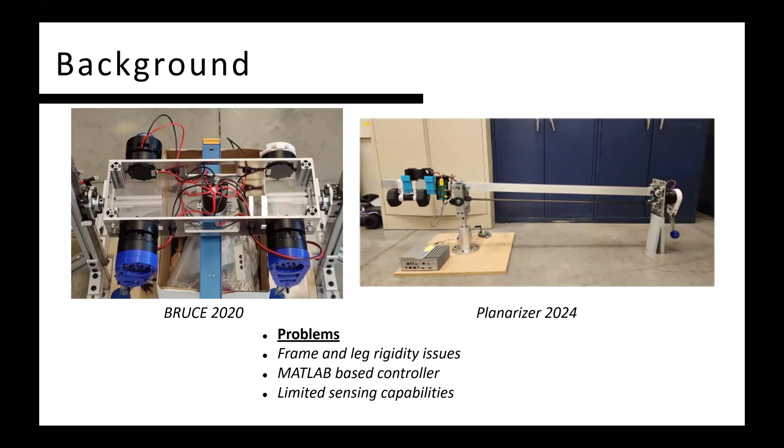So our objectives are going to be to improve mechanical design, so handle those issues, and then as we integrate new hardware components, we're going to have to improve the hardware to be able to take on those. We're going to design a wireless mobile robotics development stack. So our development and our control, and we're going to be able to view the robot wirelessly. And that's going to give us some increased mobility because we were previously tied to the ground.

And then we're going to maintain modularity in our hardware and software, and that's going to ensure that as we move forward with this project into the future, we can keep that long-term utility. So some of the things that we can make now are going to be useful into the future.

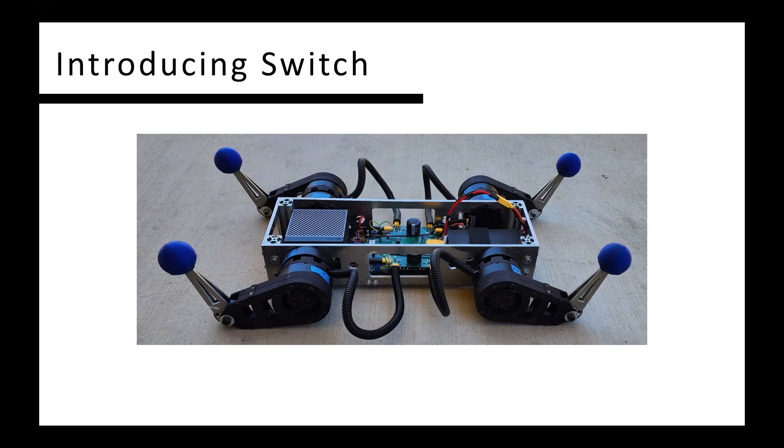So overview. This is Switch, so this is our upgraded version. We've got some new hardware here. It took a lot of work, but we got there. To highlight a few things, we're using the Steadywin GIM8108 mini cheetah motors. We're going to talk more about these later. We've added an IMU, which is underneath the PCB. And then our compute module is the Jetson AGX Orin Dev, which is very exciting. We get to use that.

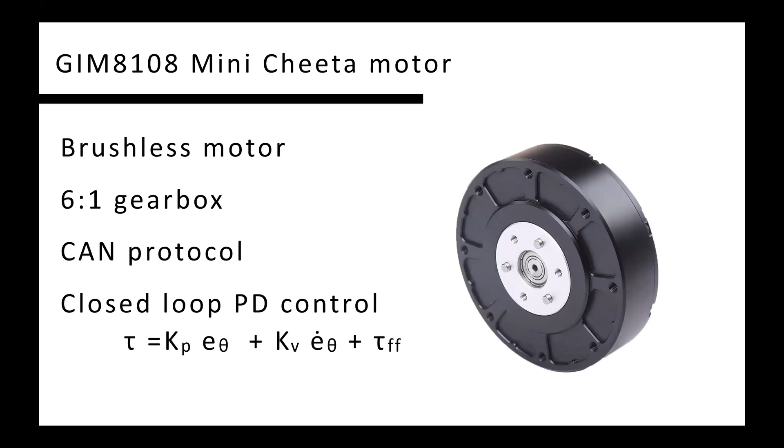Additionally, we've got a LiPo battery in there. So we've got mobile power, and then also a power distribution board, or PDB, which takes that power and distributes it to the motors. Starting out with the motors, these guys are more than just your standard brushless motor. So they've got a brushless motor in there. They've got a 6-to-1 gearbox, and then they also have a microcontroller.

And so we can connect to these motors via CAN protocol and send them a PD control message for positioning. So we can say, go to this position and maintain that position with a set amount of gain. This is pretty exciting, gives you a lot of different approaches for control. And then you can see the equation on the bottom there is describing how they're running that closed loop control.

For our IMU, we're using a BNO08X. So this is a 9-axis IMU. It's actually got several different sensors on it. So an IMU is using an accelerometer, a gyroscope, and a magnetometer, and that's going to give us orientation, velocity, and acceleration. Our communication protocol is either I2C or SPI to connect to this thing. And this thing is operating at a maximum of 400 hertz, plenty enough for us.

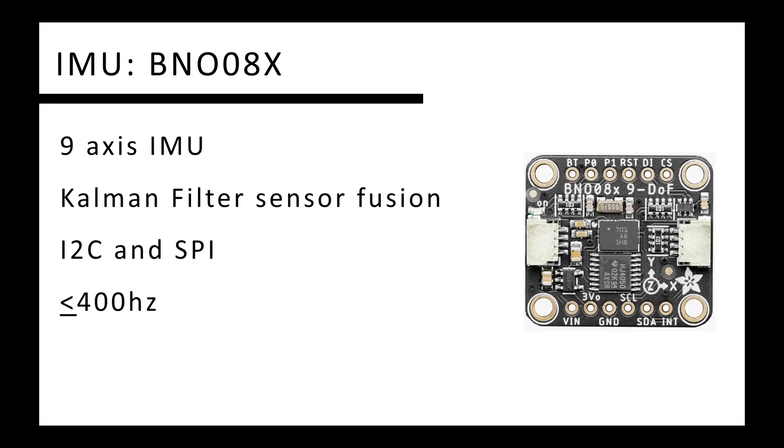And then just to touch on it a bit, this isn't the focus of the presentation, but we've got the NVIDIA Jetson Orin. The thing that sets these apart is really 3 reasons. They're quite low power, they're quite low mass, and the performance in AI is really something special while being both light and power efficient. So this is like run AI on multiple video streams levels of power. We're not going to be using it today, but it really sets us up in the future to be able to explore new topics.

So for our wired connections, we've got the motors connected over two CAN buses through CAN transceivers to the Jetson. And then on our I2C bus, we've got the IMU connected.

Both of the CAN buses are connected to the power distribution board. The power distribution board has two microcontrollers on board, so they can monitor the battery voltage and current and be able to send messages over the CAN line to the Jetson, so we can monitor the battery capacity and how much current's going through things.

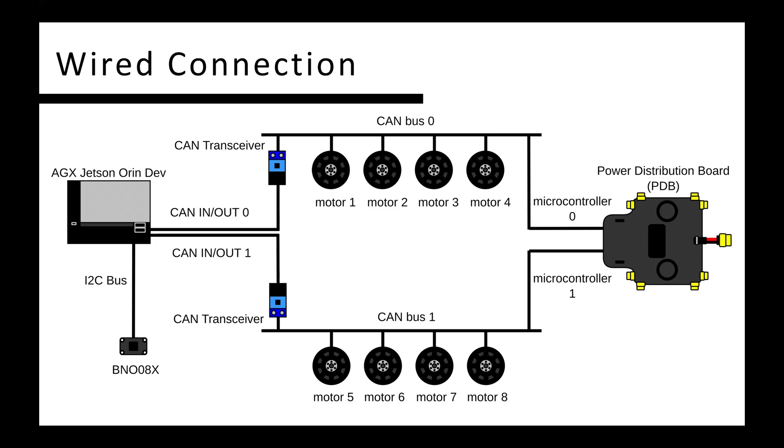Okay, so some mechanical improvements. We started out with this thing, the motors: when you tried to program them, you need to connect to a UART port, but on the hip motors on the sides, the cutouts are a little bit too small, so you couldn't actually plug anything in while it was connected up. So you have to take the whole thing apart to program it and then put it back together. So we went ahead and widened those up, and we can program them whenever we want to. Makes things a bit more convenient.

The frame had that stiffness issue. When we got it, it was actually held together by a strip of duct tape. When we're putting all this hardware on, we really need everything to be quite stiff, especially with the IMU. So we machined some frame stiffeners, installed that, and everything gets clamped together. So we got a big improvement in stiffness.

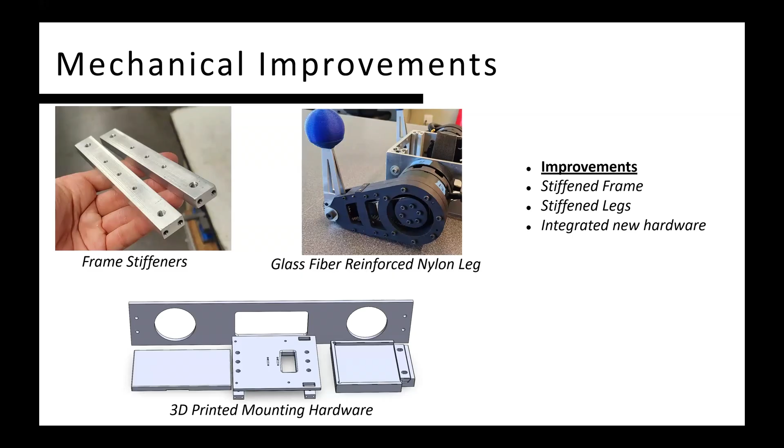For our legs, we reprinted them in glass fiber reinforced nylon, and that stiffened everything up, made everything a little bit more robust. And then we 3D printed some new mounting hardware. So we've got the battery mounting hardware for all of our electronics and PDB mounting, and then our Jetson mount. And so this stiffens the frame, stiffens the legs, and now we can integrate all of our new hardware. So now we can get into software development.

So taking a step back, when we think about the main challenges for developing advanced robot applications, the three things that we're going to focus on are, first of all, writing the robotic software. Second, resource allocation. So now that we've written this software to run things like the IMU and the motors, we're going to be running all that in parallel, so we need some way to handle all of these parallel processes. And then we're generating a huge amount of data. We need to be able to communicate that data either on board the robot to get to the controllers where it needs to go, or to different programs, or in some cases, connect it to the internet and be able to access this thing anywhere in the world.

So our solution for that is ROS2. ROS2 is an open source project, and because of that, it's got some pre-built packages. So in some cases, we can just pull software right off the internet to handle some of the hardware that we're using. Then once we've got that software, ROS has several different ways to manage these processes, so everything is being run at a regular frequency. And then it's got ROS2 middleware, which is going to handle all of our communication. They usually use DDS, but we're actually using slightly different middleware called Zenoh.

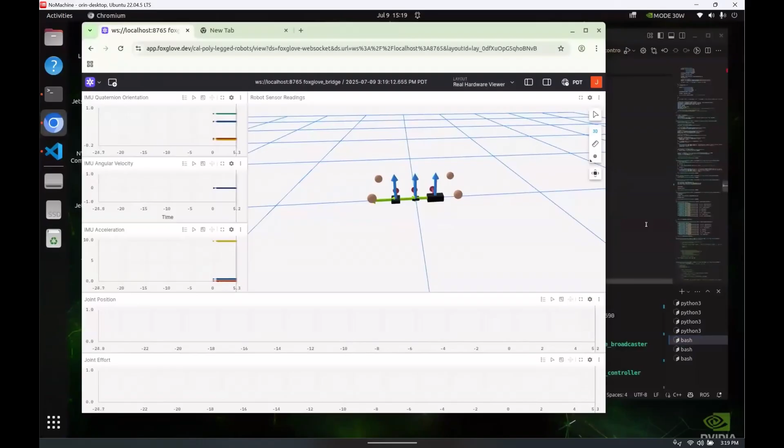And now this is our Foxglove workspace here. And we can start up our zeroing procedure. And if we look, all the legs are moving. And now our robot is synced with our Foxglove interface. So over here, we have joint positions, joint efforts, and then here we have data from the IMU. So we have orientation, angular velocity, and acceleration.

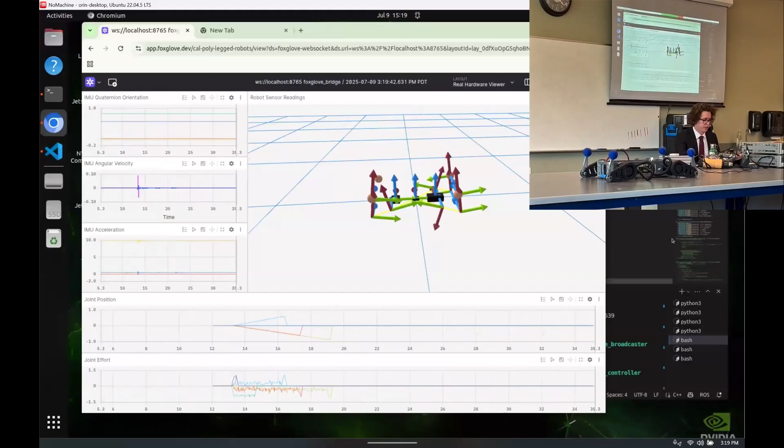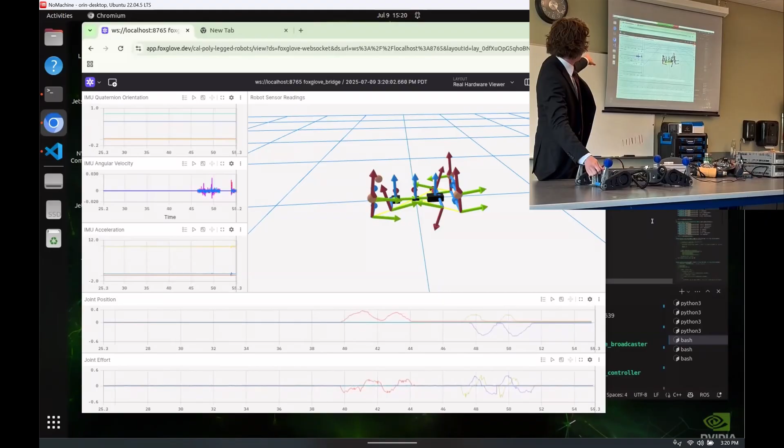So if this is working correctly, I can move a leg here, and it matches up in our workspace. I will move around. If I pick up this robot, because we have the IMU, if you look at the top left side, we're going to see spikes in orientation and acceleration.

And then we can get a readout over here. So we're seeing all the motors are zeroing and everything is working correctly. Do Control C, everything shuts down. And we just got a clean startup, ran our standard operating procedure, and then shut everything down.

All right. Now on our implementation. So how exactly are we doing that? So we've got the Jetson on board the switch, and that Jetson is connected to a router in the back of the room. Through that wireless connection, we can manage our NoMachine service and our ROS2 middleware service. In this case, me remoting into the Jetson, that was NoMachine, and we could see ROS2 running there.

But we actually have additional utility here. Because we're using ROS2, we can actually have other users connect to this Jetson and be able to access the ROS2 workspace, get all that information that Foxglove is getting without needing full admin access with NoMachine.

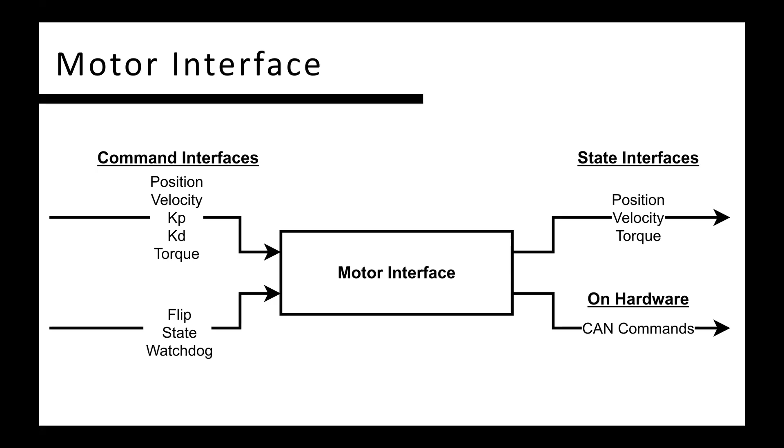Taking a kind of a different look, for our IMU, we got to do something kind of interesting. There was a really, really well-written ROS2 node for a BNO08X, which is exactly the hardware that we're using. Several thousand lines long that handled all of the difficulties, but it wasn't in ROS2 control. So what we ended up doing is we copied that node, and then we wrote an IMU forwarder. So all it has to do is subscribe to the topics that this node creates, and then forward it as state interfaces into ROS2 control land. And then we've got all of the information wherever we need it.

So when we're trying to debug this thing, it's important to realize that failures are going to cascade upwards here. So if we have a low level like power failure, that's going to cause everything upstream dependent on that to fail. This kind of just helps us with debugging. And also, as we're designing the system, if some systems fail, it's going to cause everything upstream of it to fail. So to the best of our ability, we try to make this as thin as possible, but you're going to get dependencies. It's just kind of an inevitability, but we've done our best to limit those.

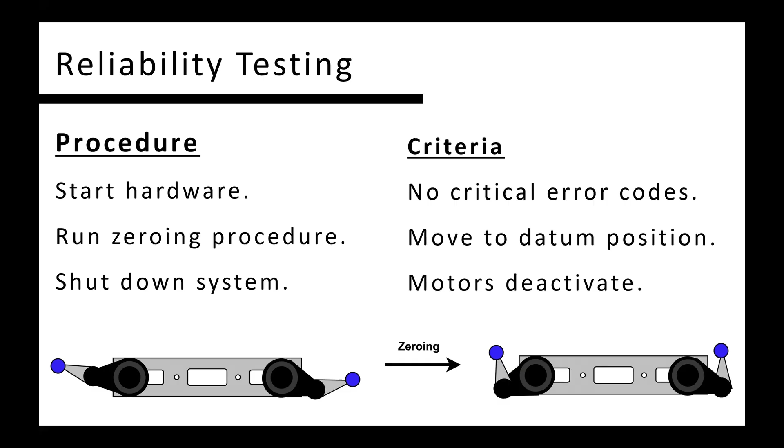All right, and now on to our low-level testing. We're going to look at reliability testing, our IMU benchmark, our IMU jitter test, and then an impulse test. So for our reliability testing, that procedure that I just showed you at the very beginning, we're going to start up our hardware, we're going to run our zeroing procedure, and we're going to shut down the system. What we're looking for is no critical error codes. We want everything to move into position. We're going to be dependent on that when we run the robot. And then when we shut everything down, we're looking for all the motors to deactivate cleanly. We don't want any error codes or anything like that.

So our results, we ran 20 trials and we got 20 successes, which is pretty good. Something interesting though was as this thing starts up, motor 17 had a watchdog hit. And in this case, that's okay. As we're starting things up, things are going to take a little bit longer to run because you're starting all of that activation code. It isn't just like standard operating. But it does kind of beg an interesting question.

Originally, the way that ROS2 control was organized, if you have any of these hardware interfaces take longer than you expect, everything in your system will kind of hang up longer. So what we ended up doing was a multi-threaded approach. And so that lessens our dependency on that. So one of our motors can completely crash and everything else can operate without getting hung up.

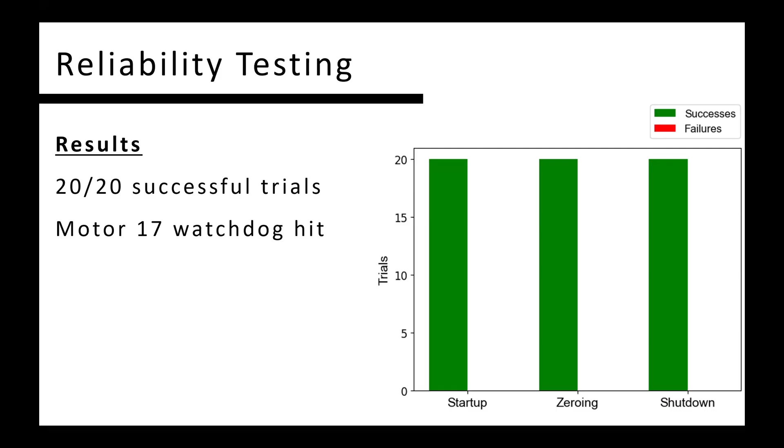So for our IMU benchmark, this is just to take a look at what our IMU does in that standard operating procedure. So we're going to record some data with Foxglove, visualize it, and then we're going to rotate, and we're going to take a look at all of the readings from our sensors.

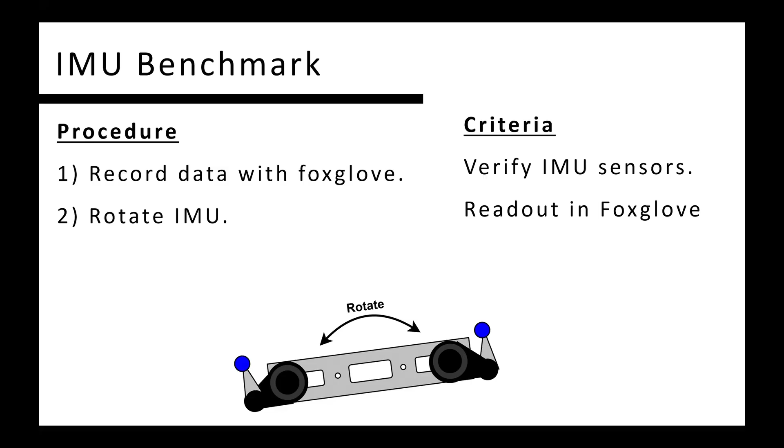So just like we saw in Foxglove, we're getting some nice output data over here. And then if we look at our orientation, it's a little bit difficult. We're expressing that in a normalized quaternion, so it's a little difficult to understand. But if you look at the linear acceleration, 9.8 meters per second squared, pretty close to 10.

So as we're rotating this robot around, we see X is positive, and then we rotate 90 degrees, and we get Y being positive, and we rotate again, we get a negative X, and we rotate, and we get a positive Z. So we're seeing what we're expecting here. And then additionally, we can focus on the magnetic field here. So the magnetic field is helping us with orientation data. And then we had an interesting question about that.

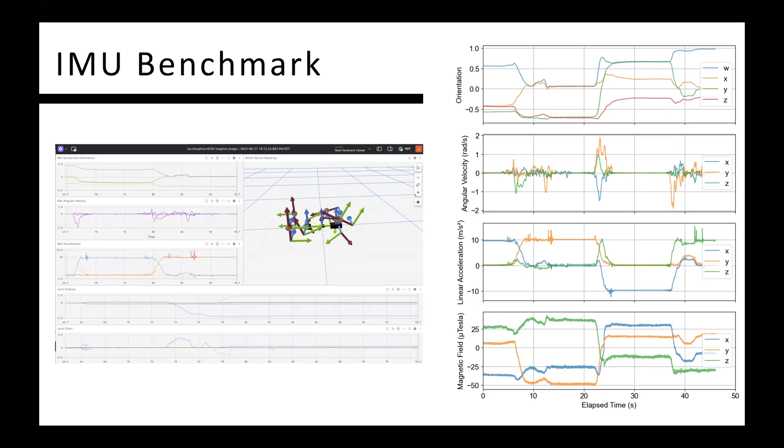Since the magnetometer is going to be recording electromagnetic fields, we've got a lot of motors here that are inducing electromagnetic fields. And not only that, they're FOC motors. So they actually have a magnet on the shaft, which is acting as an encoder. So this is another rotating field just as the motor rotates. So the question is, is operating the motors on this thing going to make the IMU go haywire?

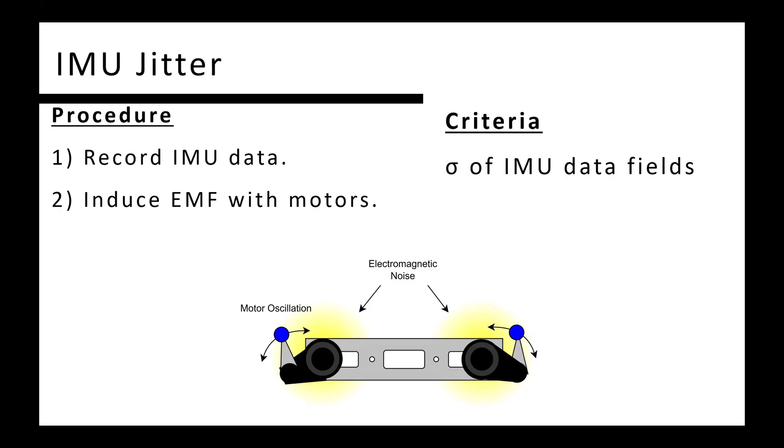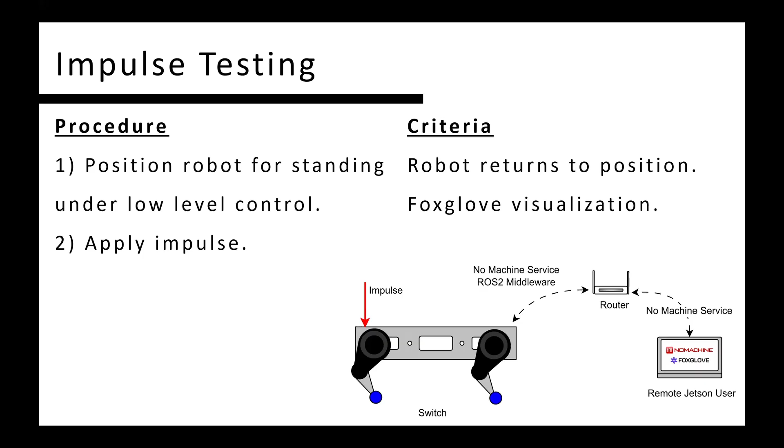All right, and then impulse testing. So we got this robot standing up, and we can do that because we can just send a position command to all these motors to say, hold this position. And then as it's standing, we can apply an impulse, we can hit it, and we can read everything in Foxglove and just make sure that everything is operating as we'd expect, and also that this thing recovers from the impulse.

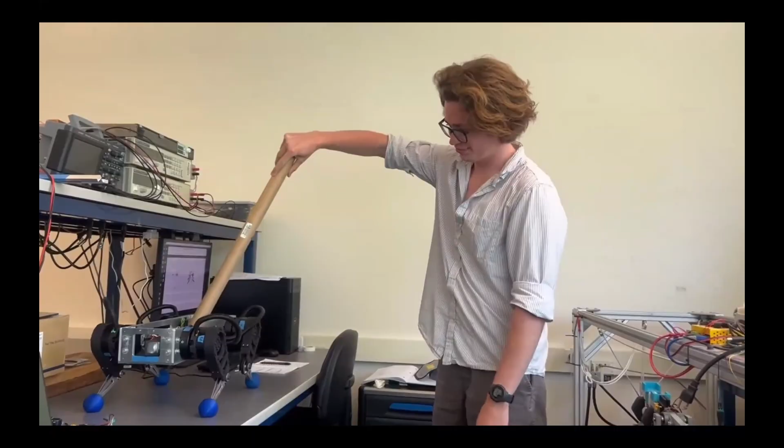This was a fun one. That last bit was me telling Jack that I had to kick it next, like Boston Dynamics.

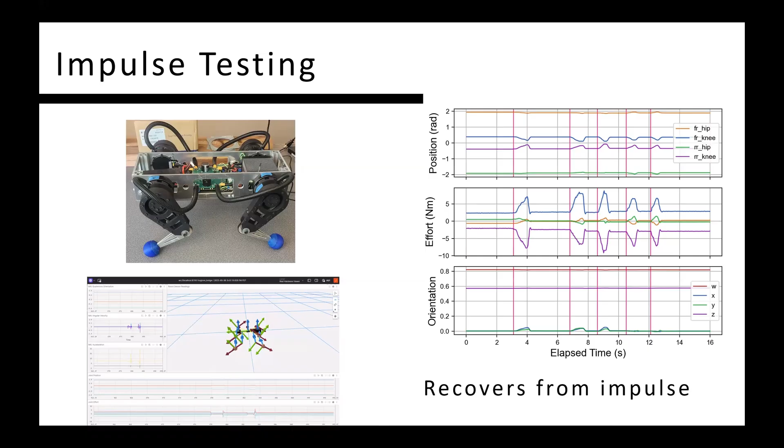So conclusions, we were able to improve our design here, and we're able to integrate all of that new hardware we're very happy about. We were able to specify a mobile robotic development stack, and we achieved that increased mobility. And then we also maintain modularity in our hardware, which is going to give us utility in the future for the system. So as we move forward to a 12-degree-of-freedom robot, or in the future, we can use the software that we were using.

And then Kai's working on the 12-degree-of-freedom system, so he can reuse some of the software that I wrote, and also learn some of the things that we learned from this hardware integration. And then something interesting, the way that we set up this project makes new applications of this system very straightforward, I'll say.